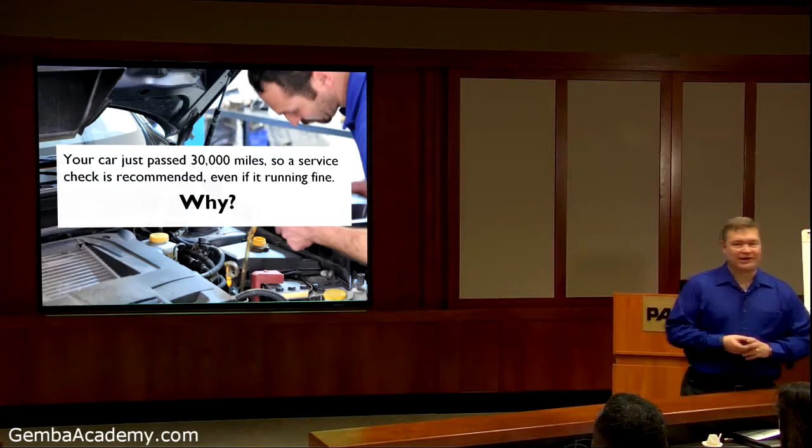So we want to set up systems where we don't have that. So we want to check. It's also a pay me now or pay me later. Typically it's pay me more later is what happens.

If you have a major pump repair, if it's unplanned, it probably takes you about 200 hours as an example of downtime. It'll cost about $60,000 to replace it, usually 10 times the normal cost. Why? Because you have overtime, you have to expedite it, you got shipping, you can lose production, you got outside help that comes in. There's all things you have to do to firefight to get things done fast. If you didn't have to do that, maybe it would only take 72 hours of planned downtime, and you would have had things planned up front that could have cost you less, maybe $6,000. Those are just figures as an example. But you can do the simple math that any time I can plan something, it's going to be cheaper than if it was a reaction to something that happened at an inconvenient time.

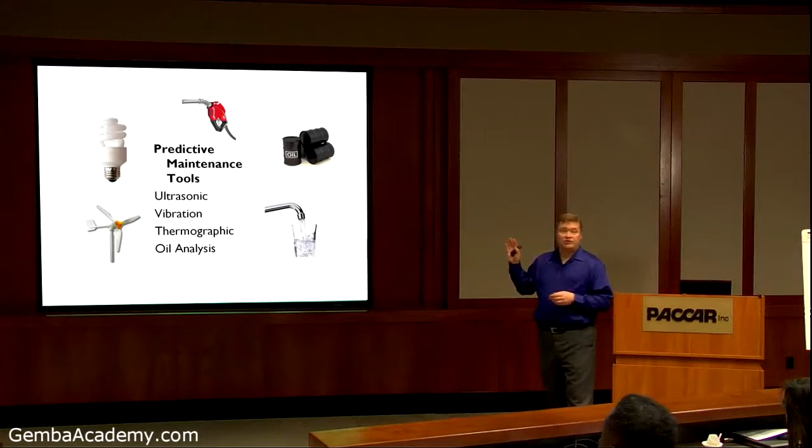So the point is, how can we prevent those inconvenient times from happening? It also can save us energy. You can go into some super equipment, and this is something when you get further along in TPM, to start looking at prevention, investing in things like ultrasonic equipment, vibration equipment, thermographic, and oil analysis.

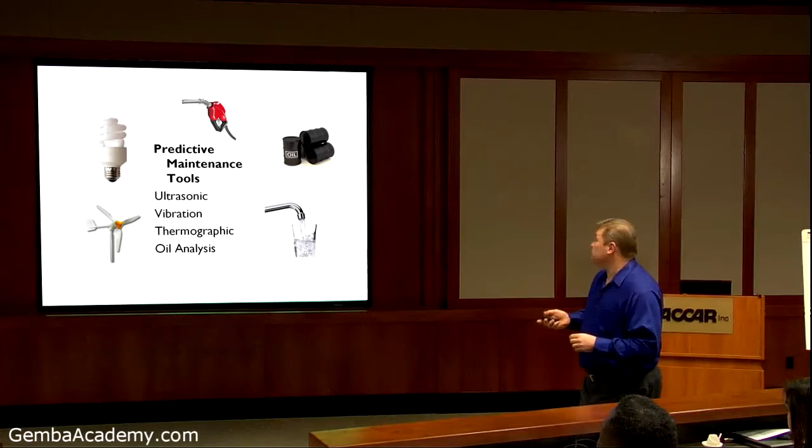Let's take oil analysis as one example. Just like you change the oil in your car, what do they tell us? Change your oil every 3,000 miles or 3 months, right? It's in the manual. Why do they tell you to do that? History, okay. Neither one is the best way to do it. The best way to do it is look at the oil itself. The oil will tell you if it needs to be changed or not. Okay? So it may be 6,000 miles, not 3,000 miles. So they're using that to ensure you can change the oil without checking it.

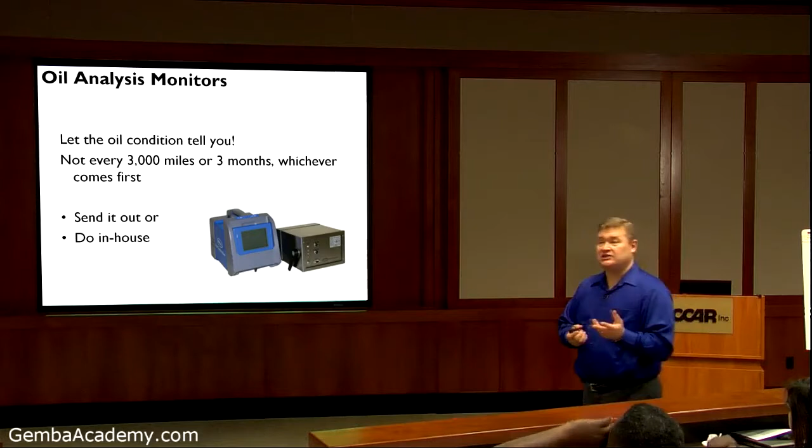We may do that in our equipment. How many people say we're going to change that every 6 months, or we're going to change that every so many hours of production? It's typically how maintenance has it set up. What you may want to look at is how can I analyze my oil, either send it out to be analyzed or do it in-house. That way I can check the oil condition, and then it can tell me when it really needs to be changed. It saves you time on changing the oil, and saves you time making sure it doesn't wear out prematurely.

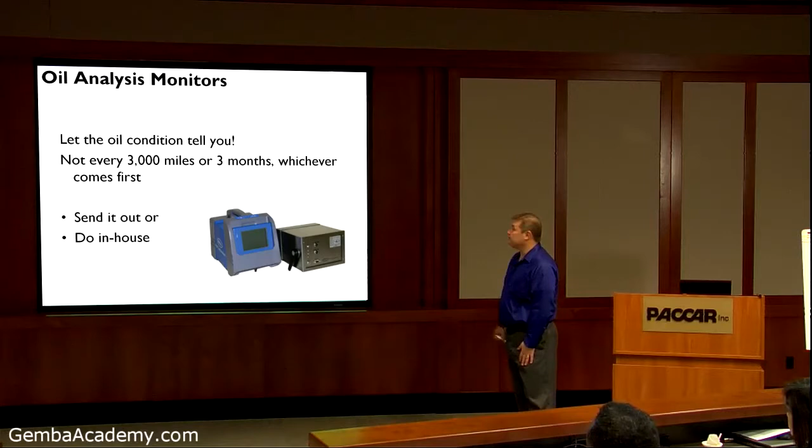Now let's talk about maintenance heaven. If you're thinking about maintenance heaven, what would be heaven to a maintenance person? This is a family channel, okay?

Okay, yeah, zero breakdowns. That would be good, right? You'd be in heaven if you had zero breakdowns. You didn't have any setups or adjustments to worry about on any pieces of equipment. That'd be heaven. You had no small stops, little interruptions, little hiccups that you got to run out and fix this lever. No speed losses. You have a piece of equipment with speed loss, what I mean is the machine's old and we can't run it full out. Let's back it down about 80%, maybe 60%, because we don't want to push it too hard. So that's a speed loss. We have to slow the machine down because it can't handle running what it's meant to be.

Startup rejections. Yeah, we got the machine set up, but we got to do a lot of adjustments to get a good piece out. So all those adjustment periods, and any product defects that happen because the machine doesn't hold the variability it should hold. So our tolerances are too tight and the machine's not capable of running those tolerances.

So we got a lot of rejects. I would consider those the big major losses, the 6 major losses that we look at. And if we didn't have those, we would be in maintenance heaven. Would you agree? So when we look at those 6 major losses, we can actually measure them with something called OEE.

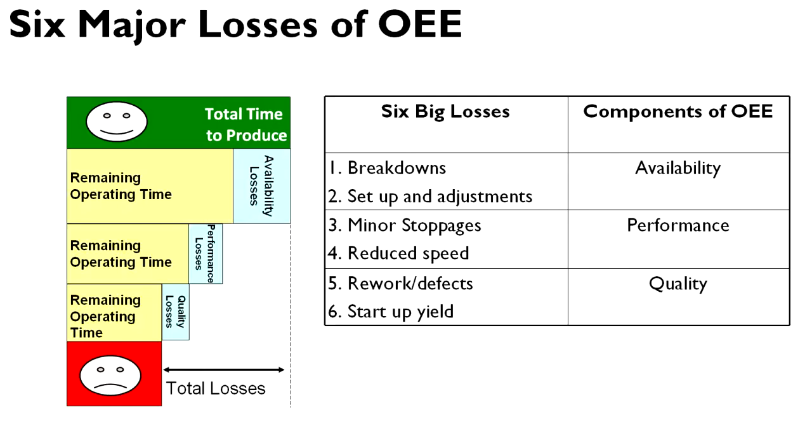So if you take all those losses during the day, you see how much time our machine is actually available running at top speed and running good quality parts. What percent of time is our machine running that way? We want to make that a larger percentage of the day than what it currently exists.

Okay, so here's a piece of equipment. It's on the logbook saying it should run for 6.5 hours. During those 6.5 hours, there was one die change, took 30 minutes. One downtime incident took 90 minutes to repair. The operator had to wait 60 minutes for additional parts to be delivered. There were 63 parts made, but 3 were rejected.

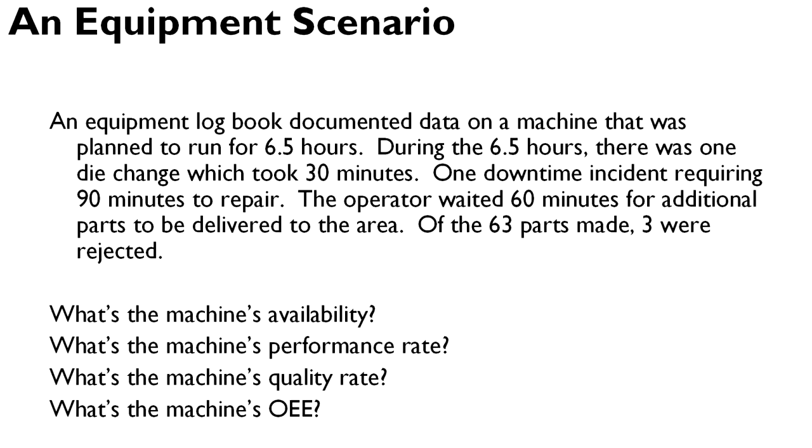So based on what we just talked about, we can measure what the availability time on that machine is, what the performance rate is, what the quality rate is, and then what's the OEE. So our OEE is basically doing the math. We took our load time of 6.5 hours, which is 390 minutes, and subtract the die change and the 90-minute stop. Dividing that out, it's 69% available.

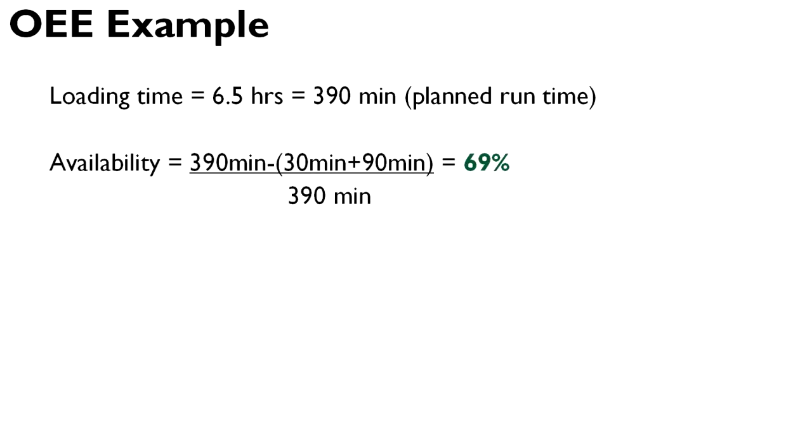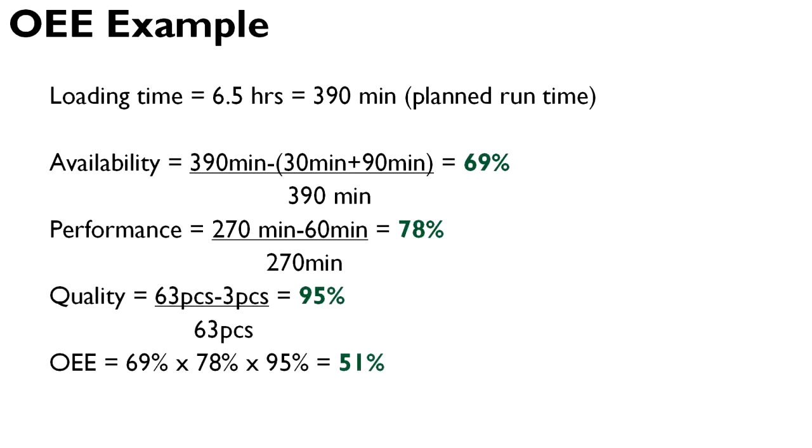So we took the losses of the setup and the breakdown at 69%. Performance was down to 78%, and the quality was 95%. You take those 3 and multiply them by each other, 69 times 78 times 95, gives you 51% OEE, overall equipment effectiveness.

Now, a lot of times we want to measure how effective our equipment is, so we institute a measure on our pieces of equipment. Usually when you first start a TPM program, you don't know how effective your equipment is, so you don't have this metric. It's a good metric to start so everybody understands what the process is, where our losses are coming from, and what we can do about it. As you get really good, it may become a point where you don't need this metric anymore, but it's a good metric to start with so everybody understands what's causing our machines not to run at full out.

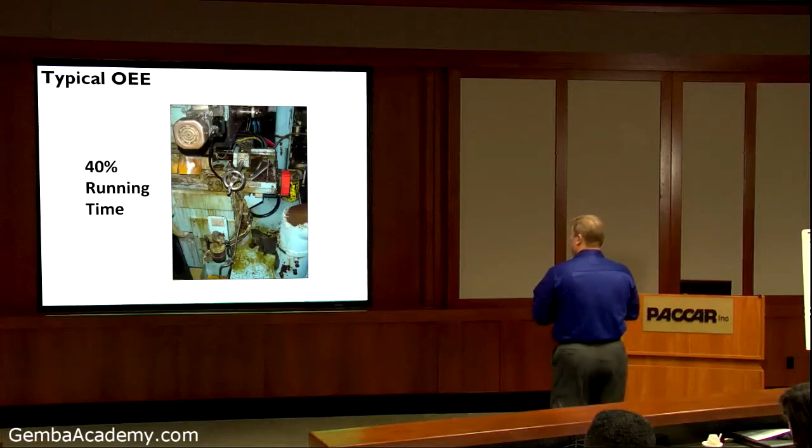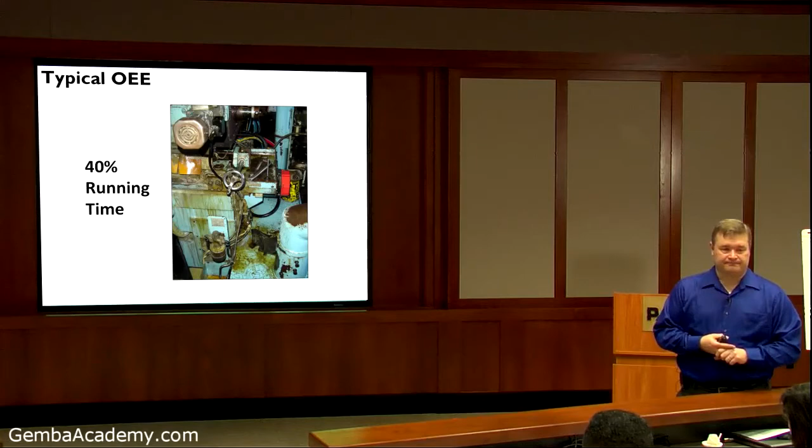Typically in the US, it's about a 40% running time. So 40% of the time you would expect our machines running if you did the true OEE on your equipment. So what's world class? World class is 85%. If you're at an 85% level, that's pretty much world class. Of course, we want to move it toward 100. Now, what happens if you have 120% OEE?

Fix your standards, exactly correct. We had that example happen to us. We had an OEE of 120%. So when we went through and looked at each of the elements, we found out that the standards set for the machine were too low. They had changed some of the tooling and improved the productivity, but never changed the standards. So they're kicking butt on getting the productivity out. They're still terrible on the other stuff, but they were so productive when it was running, it had 120%.

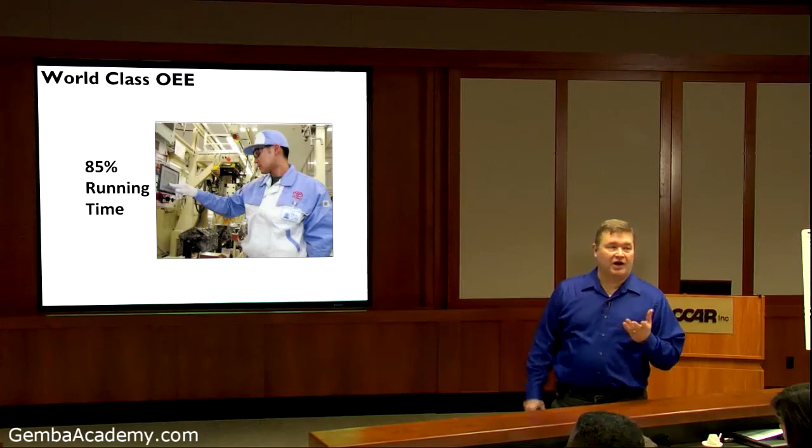So what did we do? Change the standards, reflect what it should be running. And then the OEE was back down. So you may run across that. But when you did the measures, you saw that problem. Even though people knew about it, they didn't figure it out until they did the OEE and said, oh, we should change that, we should fix that.

So every time you improve it, you're going to change the standard? No, that was just an example of where we had changed some tooling to improve the productivity, and it was reflected in the OEE. But you would do this metric, see where your losses are, and concentrate your focus on the biggest losses.

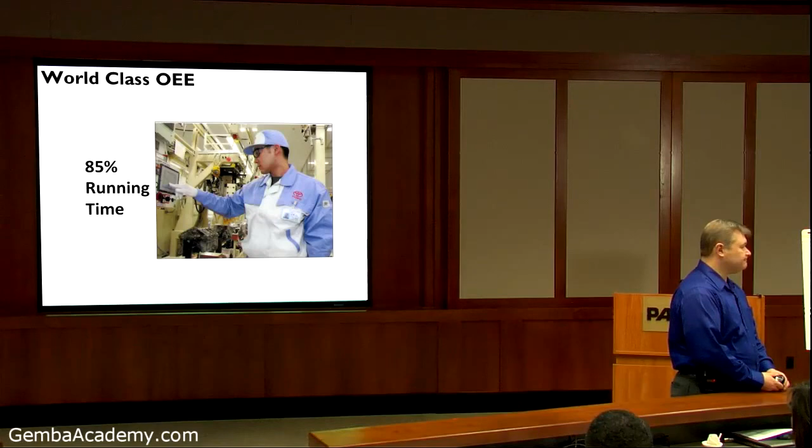Now, the biggest loss of all is if you have a loss of life or an injury. So make sure safety's first when you do a TPM program. Make sure you do the lockout, tag out, and whatever safety procedures that you have. So we talked about the 6 big losses, but that's nothing compared to this loss here. We don't want anyone losing or being injured in our equipment.